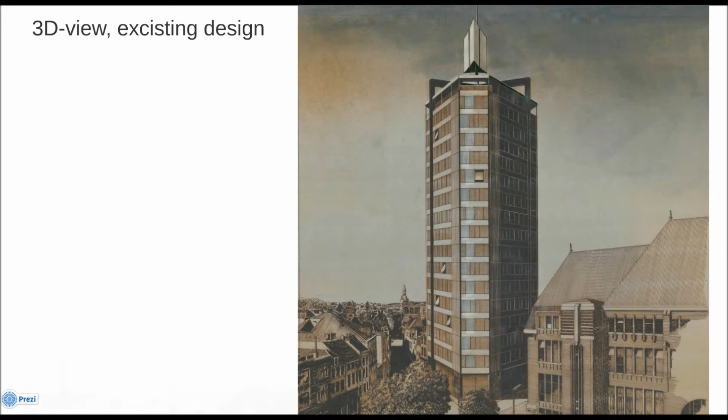The existing building. The existing floor plan. The first step is to remove the existing facade.

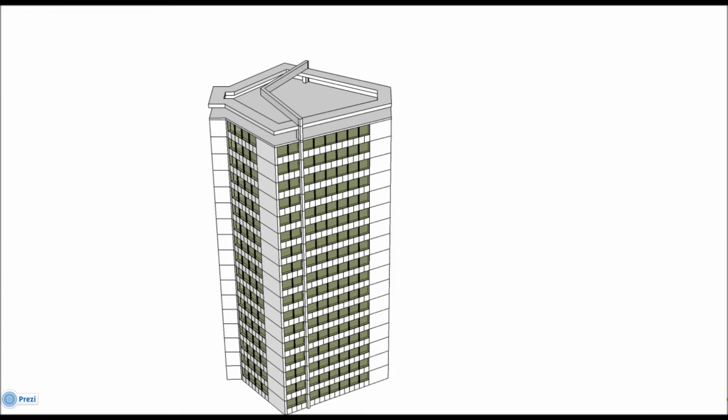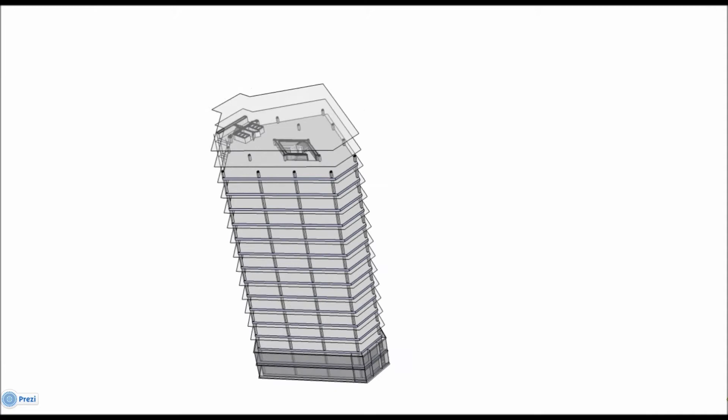We then strip down the building of its structure and create a new structural system. We keep the building floor height, the building footprint, shape and orientation. The new construction is a streamlined steel construction. We then add a new facade, which is a double skin.

Meet Windy. Windy provides our building with natural ventilation. Let's follow him on his journey through our building design and see how we make sure Windy is our new best friend.

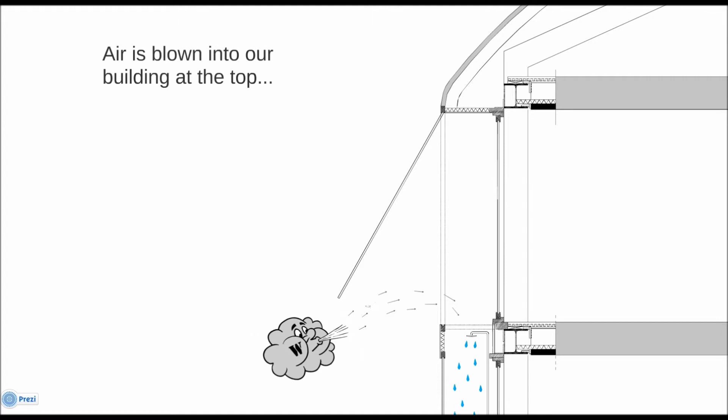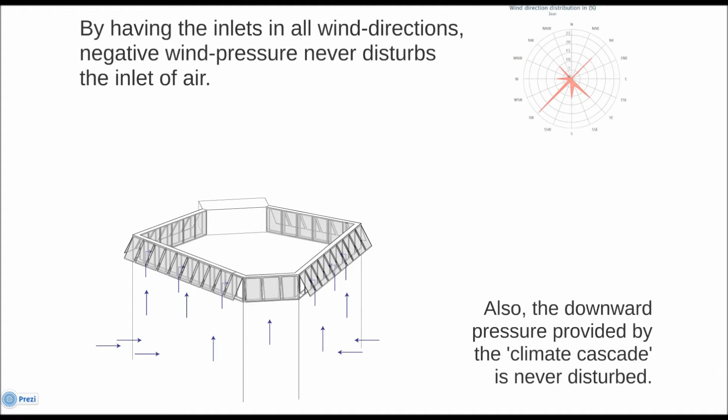Air is blown on the top of our building. By having inlets in all wind directions, negative wind pressure never disturbs the air inlets. Also, the downward pressure provided by the climate cascade is never disturbed. The inlets lead the air into the climate cascade.

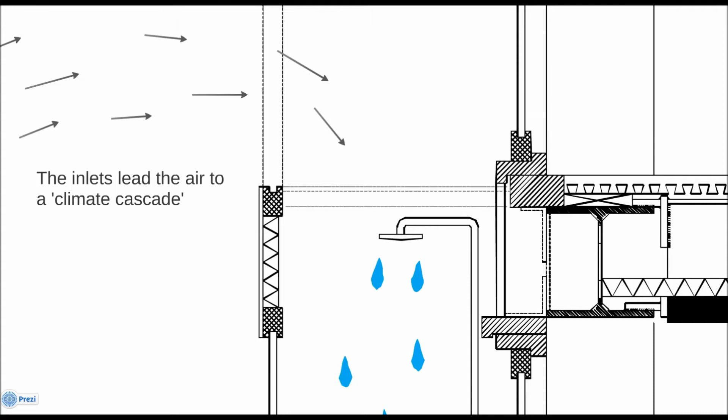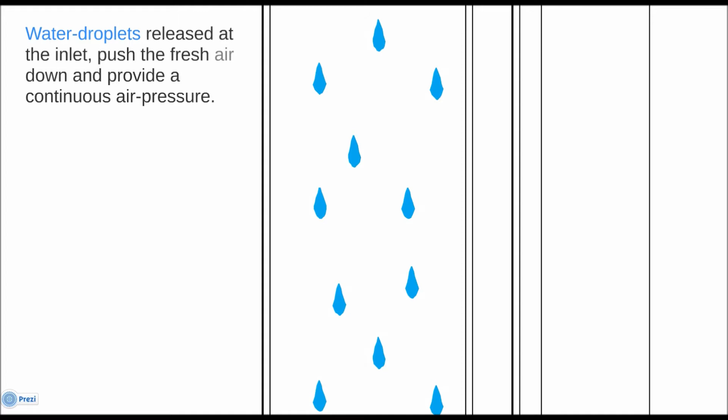Water droplets released at the inlet push the fresh air down and provide continuous air pressure. So even without wind, the system works. While air falls, the temperature droplets heat or cool the fresh air downwards to approximately 13 degrees Celsius.

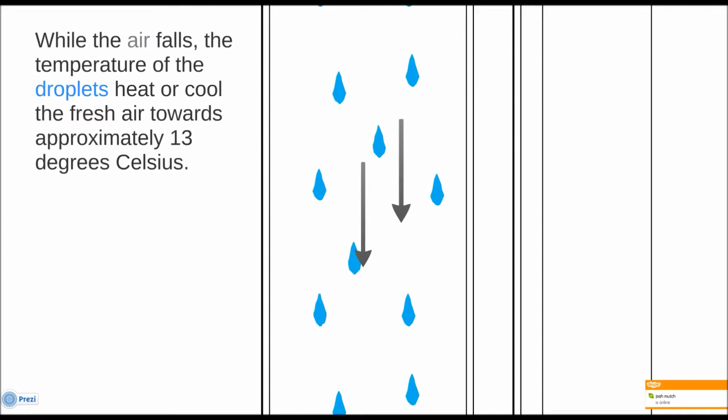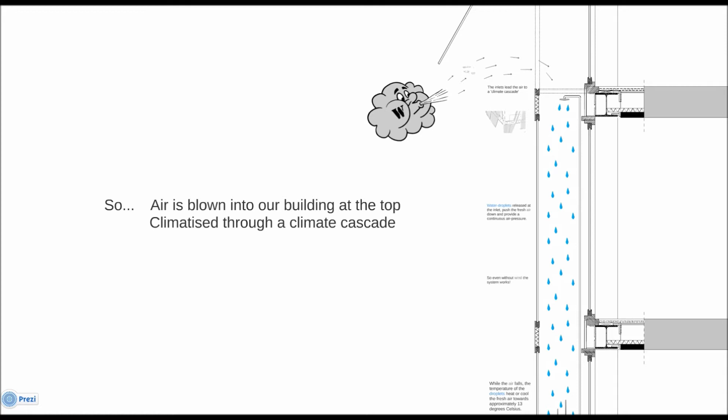So air is blown into the top of our building, climatized through the climate cascade. At the bottom, a basin collects water. Due to the pressure, the air is pushed upwards again through a second shaft.

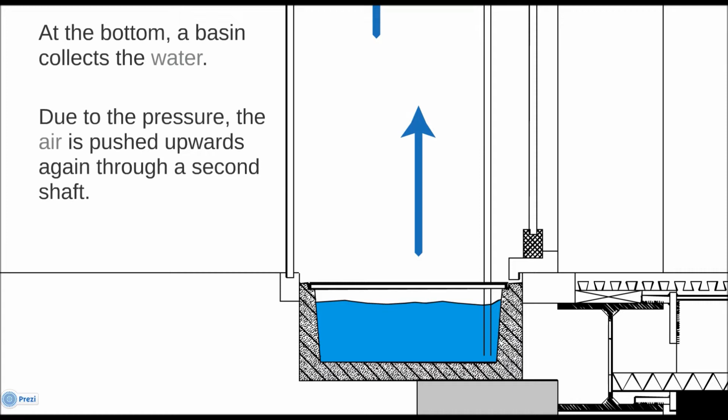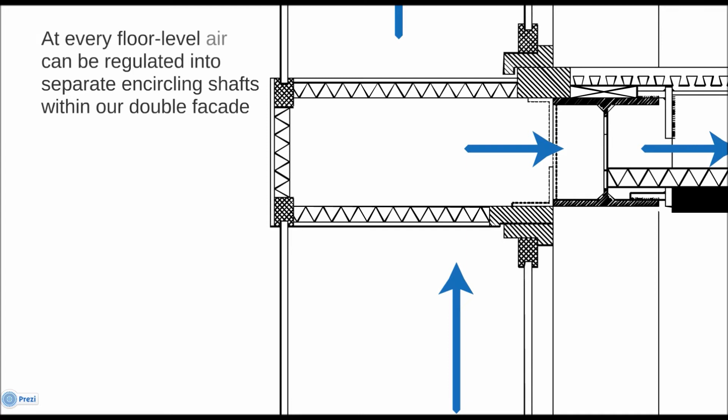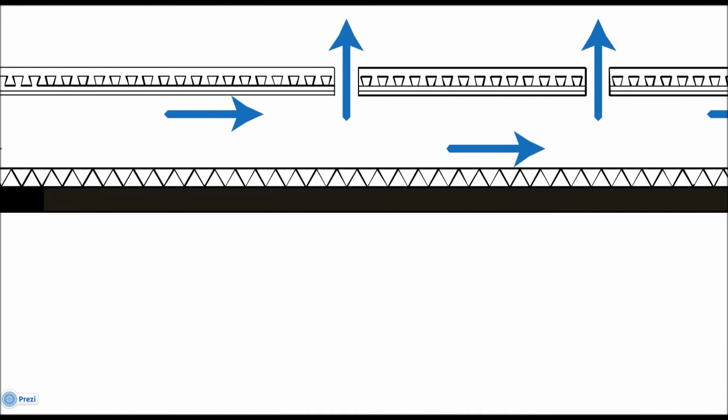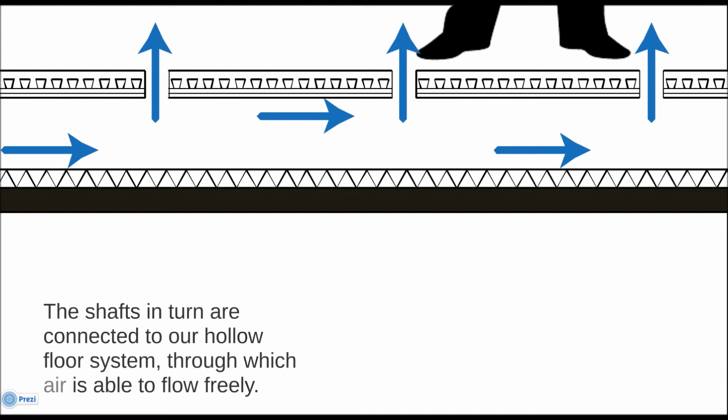At every floor level, air can be regulated into separate encircling shafts within our double facade. The shafts in turn are connected to our hollow floor system, through which air is able to flow freely. Regulators divide the air over the floor.

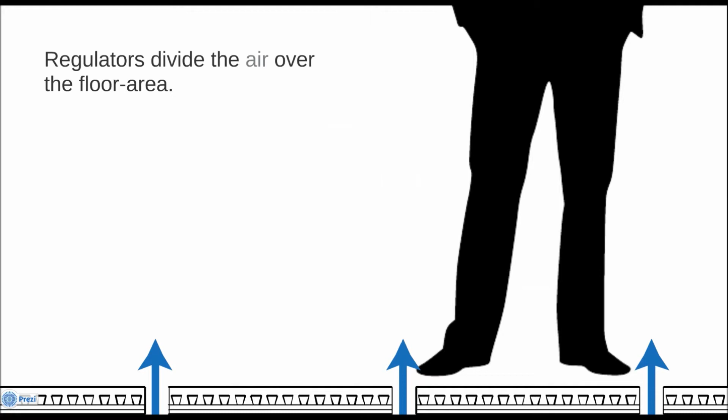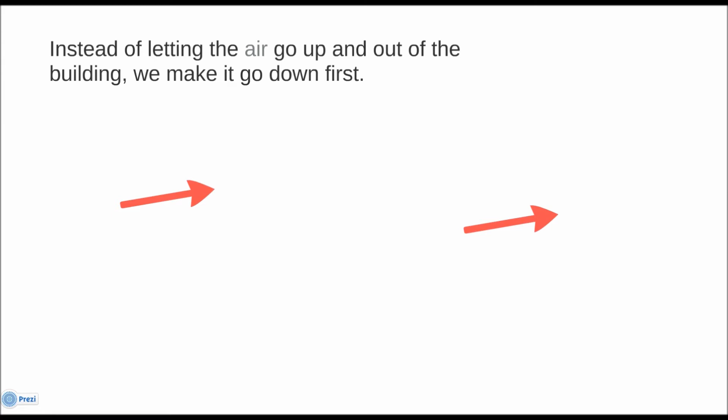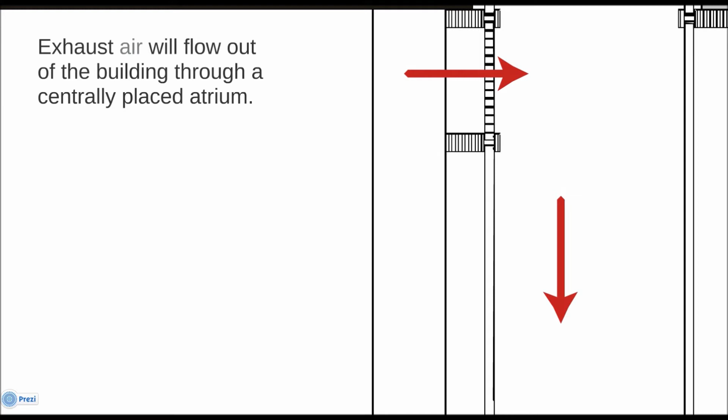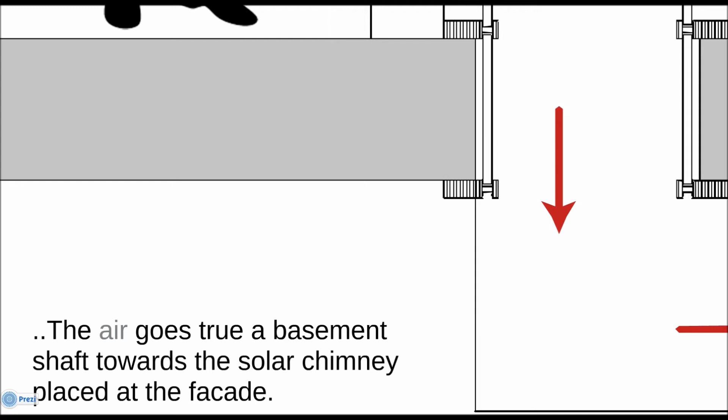Instead of letting the air go up and out of the building, we make it go down first. Exhausted air will flow out of our building through a centrally placed atrium. And where does the air come down? The air goes through into the basement towards the solar chimney placed on the facade.

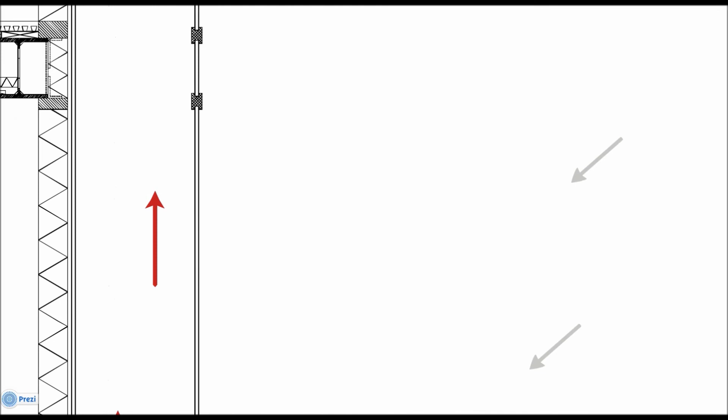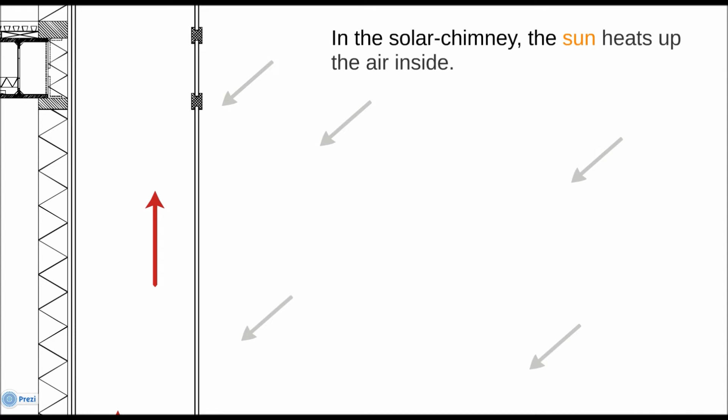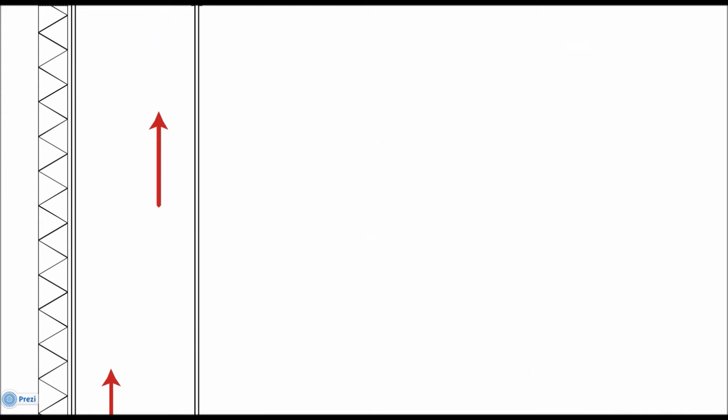How and why does this happen? Meet Sunny. In the solar chimney, sun heats up the air inside. Sun heat adds extra positive pressure by means of the solar chimney to benefit natural airflow. That needs to happen on the south facade in order to get optimum sunlight.

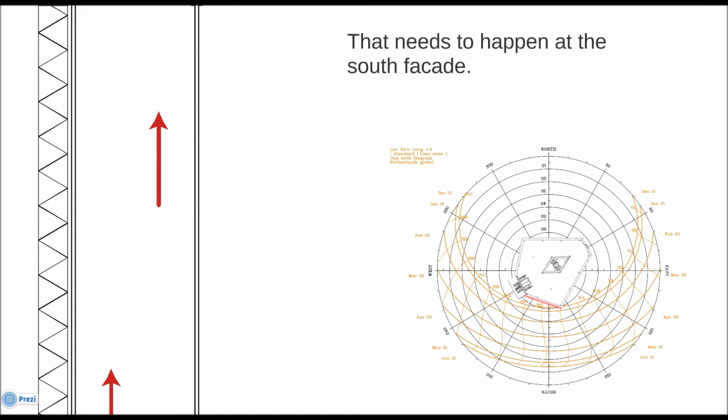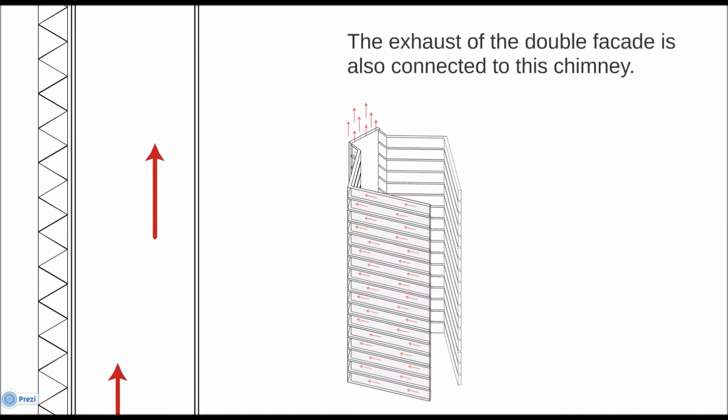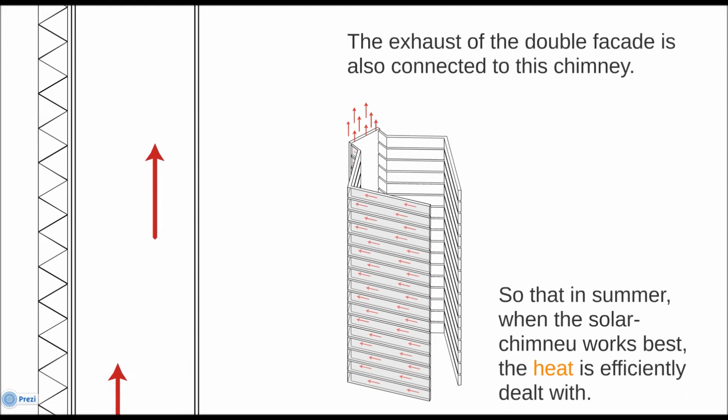The exhaust of the double facade is also connected to this chimney. So in summer, when the solar chimney works best, the heat is efficiently dealt with. In winter, the connection is closed off, so that air can provide insulation within the double skin facade.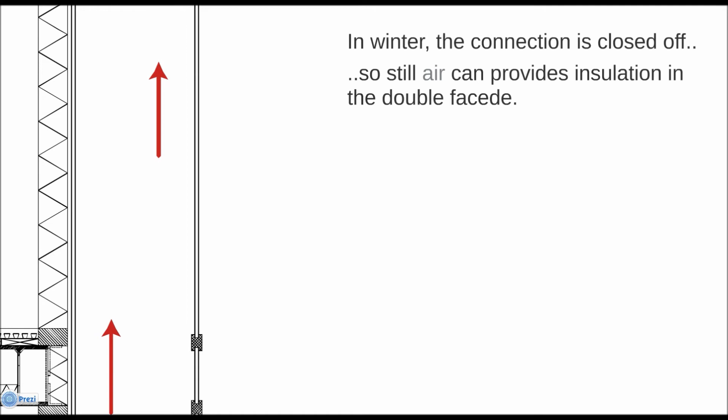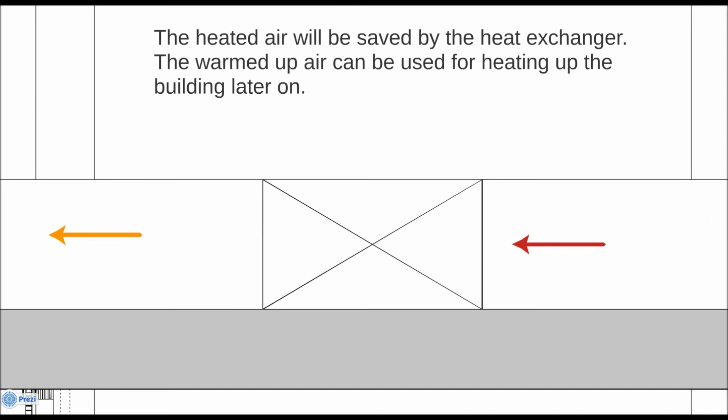The heated air will be saved by the heat exchanger. The warmed up air can then be used to heat up the building in wintertime. A venturi roof on top of the building ensures that the solar chimney has extra suction.

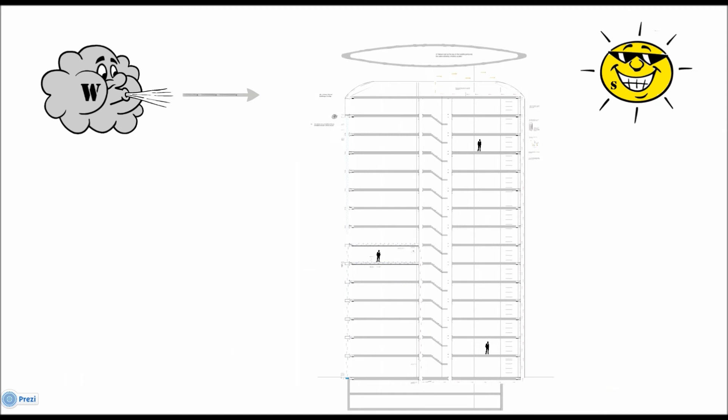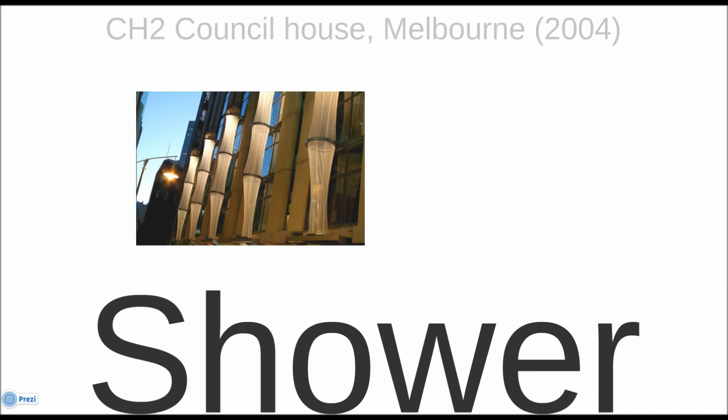How do we know this works? References. The shower tower. An excellent example of the shower tower is the CH2 Council House in Melbourne. The floor system. The floor system we use as our reference is the slimline floor concept.

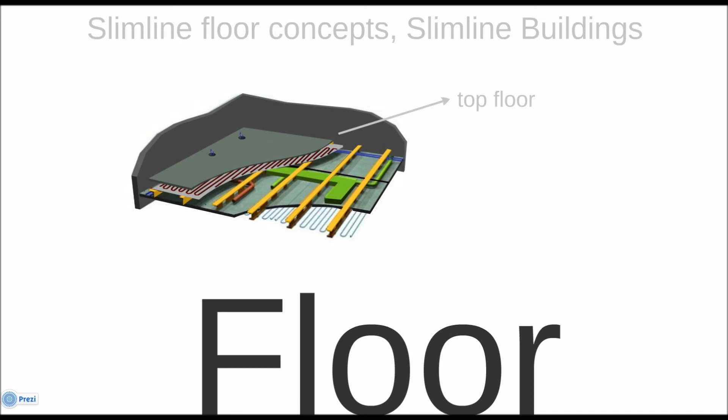On the top floor, there are air distribution outlets. A floor heating system is tucked away. A hollow steel beam construction allows the system to have ducts within. A ceiling is placed below, and there is a possible chance for cooling to be placed underneath.

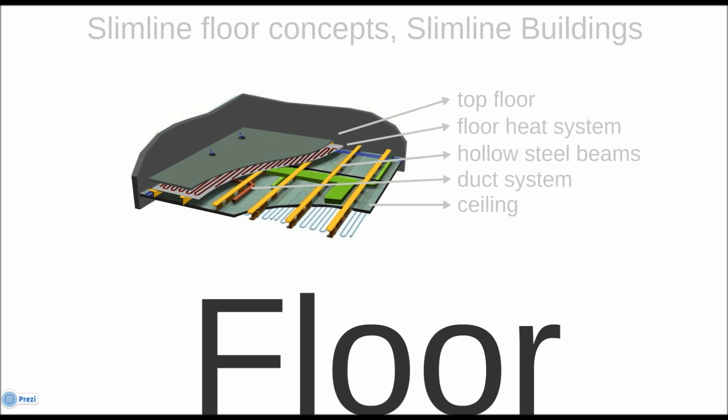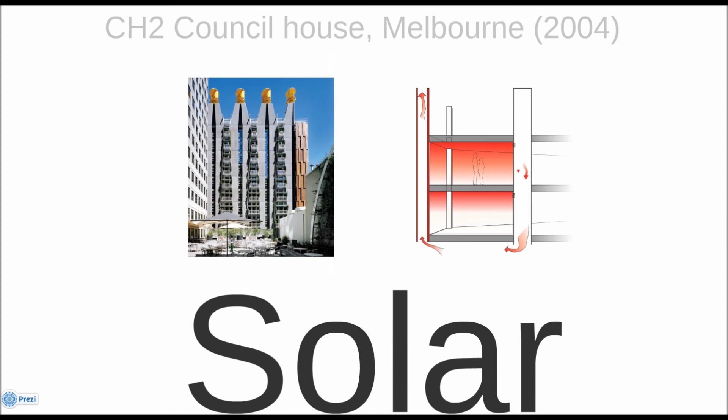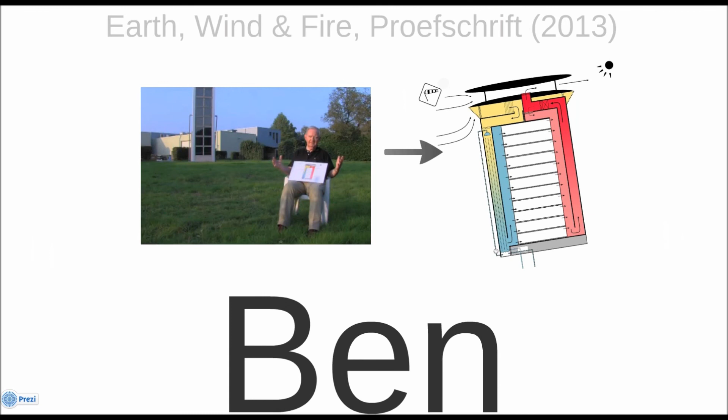The solar chimney. Again, we have used the reference of the Council House in Melbourne as an excellent example of a solar chimney. Finally, we have Ben Bronsema, the creator of the earth, wind, fire concept, from which we have devised our construction and our building of the new Neudeflat. The next step.